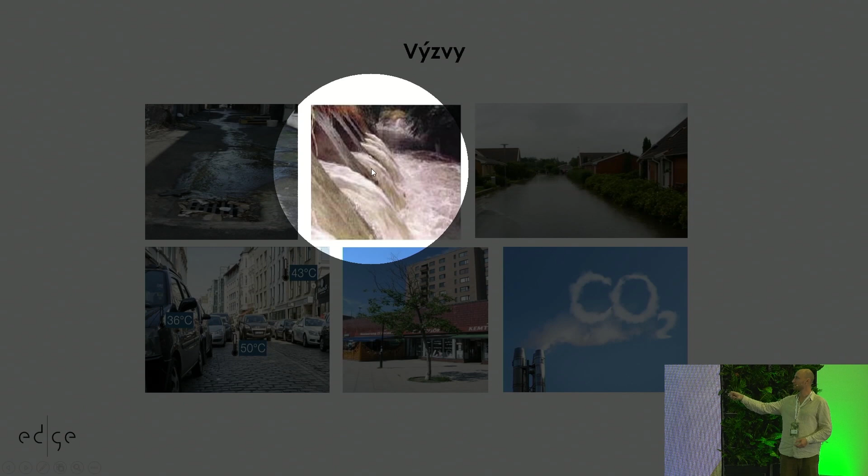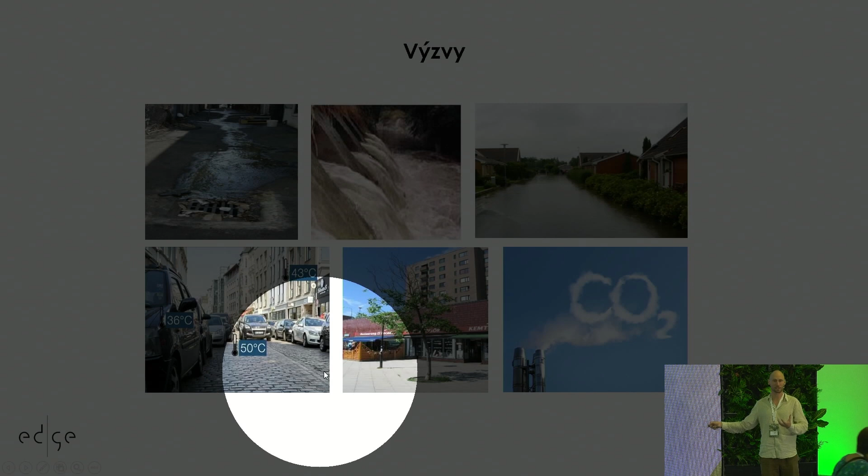As you've already noticed at the beginning, we are facing a couple of big challenges as a society. We need to take care of the pollution in our waters if we want to align with the European directive on waters. We want to reduce the flow of the rainwater, and we also want to increase the retention of the rainfall so that we reduce the risk of flooding in our cities. We also want to reduce the warming in our cities, or overheating. We want to work with the vegetation so that it enables us to get all the ecosystem services that we can get from it. So how to do it in a space with lots of reinforced surfaces?

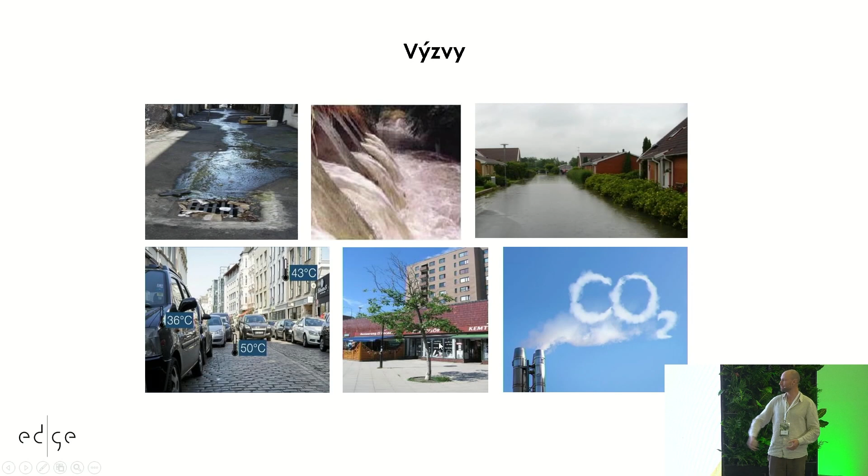And as we've already heard at the beginning from Jan, another challenge is how to adapt, how to reduce the carbon footprint, because even though we reduce it, we will keep producing some carbon footprint, and how to optimize the selection of material and also the volume of the material so that the carbon footprint is the lowest possible, and so that we create buildings that can reduce CO2 by having vegetation such as trees.

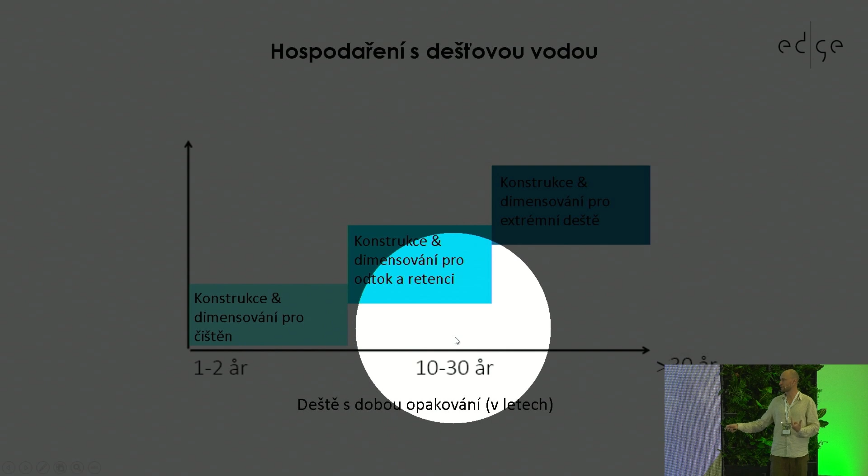So let's get going with the first challenge: what to do with the pollution of rainwater. We work with the rainwater. We usually work with different types of rain. For example, the rains that are regular, for example, 1-year or 2-year rain. It can also be very strong rains that appear only once every 10 or 30 years, and then there are extremely strong rains. And we have blue and green constructions that are being dimensioned for these rains.

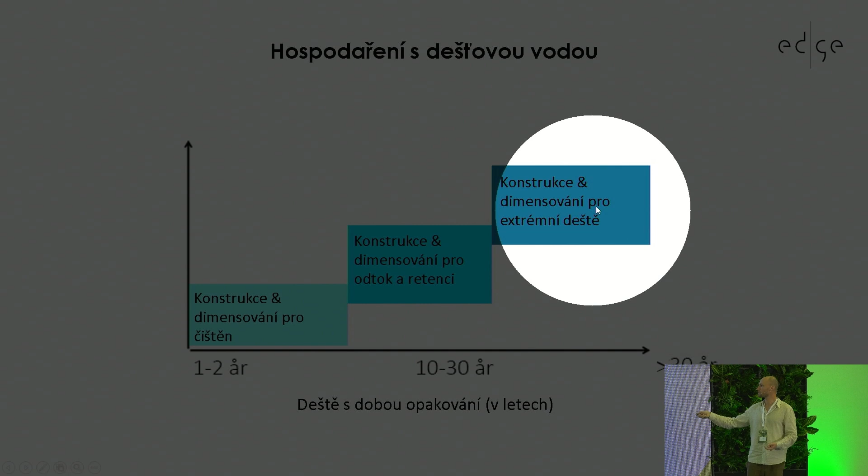Nowadays, there is no construction that would manage to be dimensioned for all these three types of boxes that you see in front of you. So we have constructions that work with purification of the rainwater. We have constructions that retain the water in case of strong rain. And then we also have constructions that can hold the torrential rains.

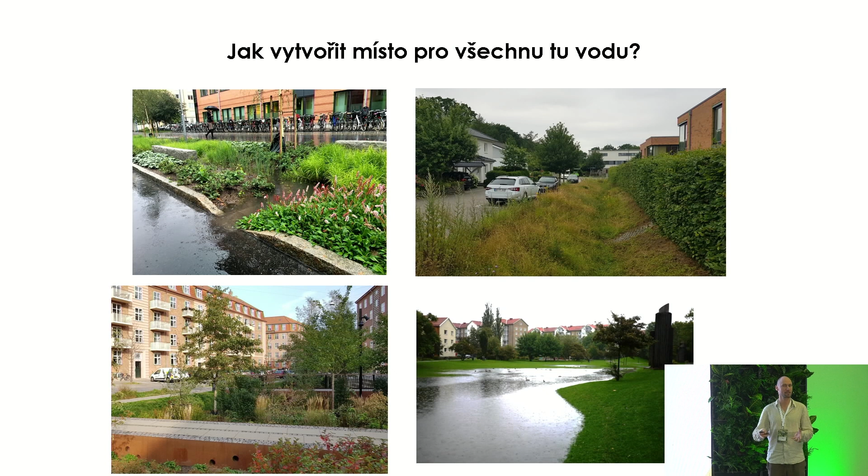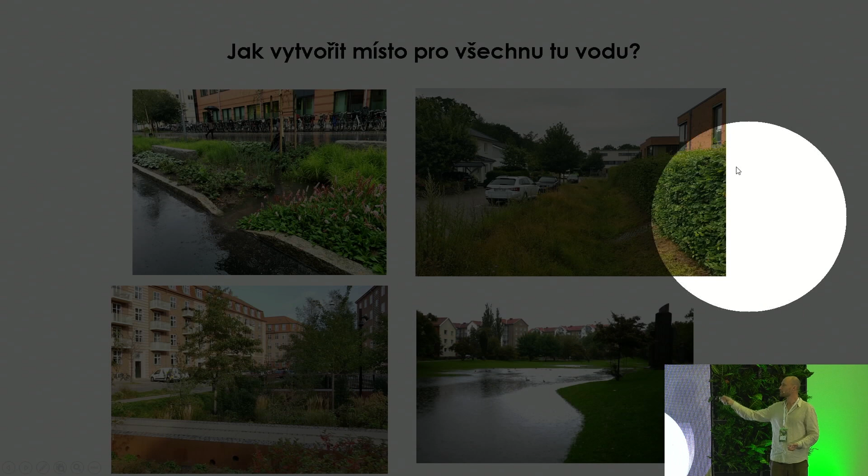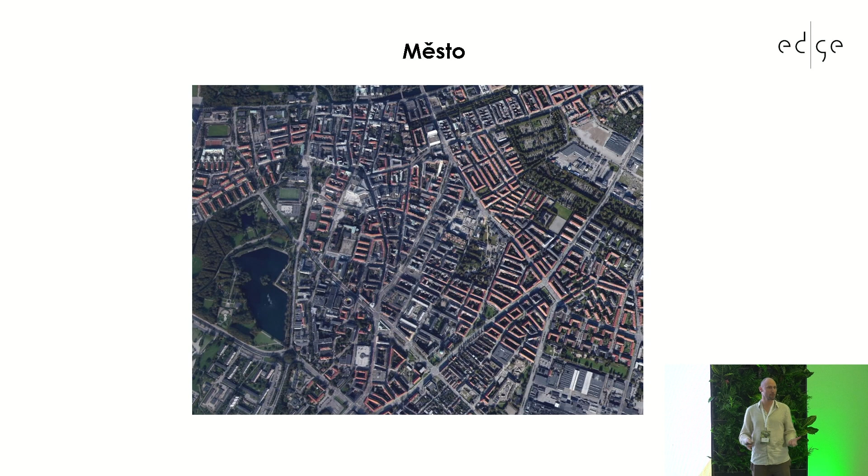And many of you definitely know blue-green infrastructure. This is a topic that has been in existence for several decades, and you definitely know that there are various surface solutions, for example, swales or various greenery or parks. And all these solutions need a huge space. But if you have a look at our cities, the existing cities that we need to adapt in some way, do we have any room for these solutions? Because they are already built. There is lots of infrastructure, either above or below the surface or on the surface.

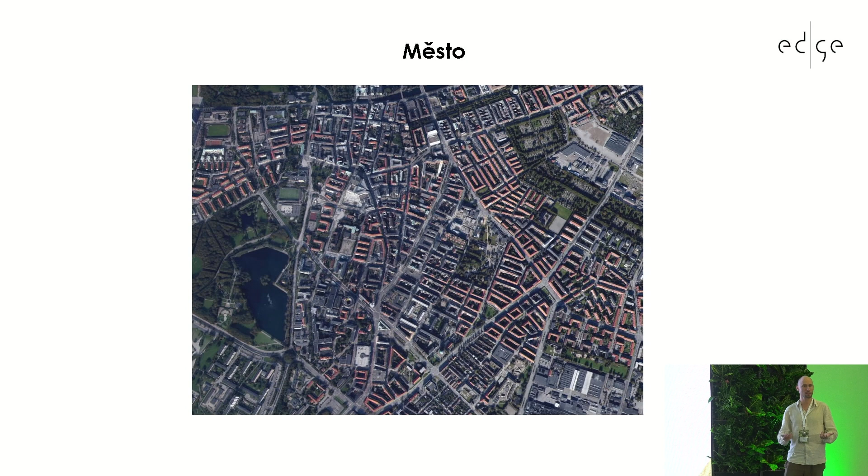How to get these solutions there so these solutions are also efficient and they can address these challenges? And how can we get trees into these spaces? Because we need to get there also this ecosystem services or ecosystemic services, so not only to retain the rainwater.

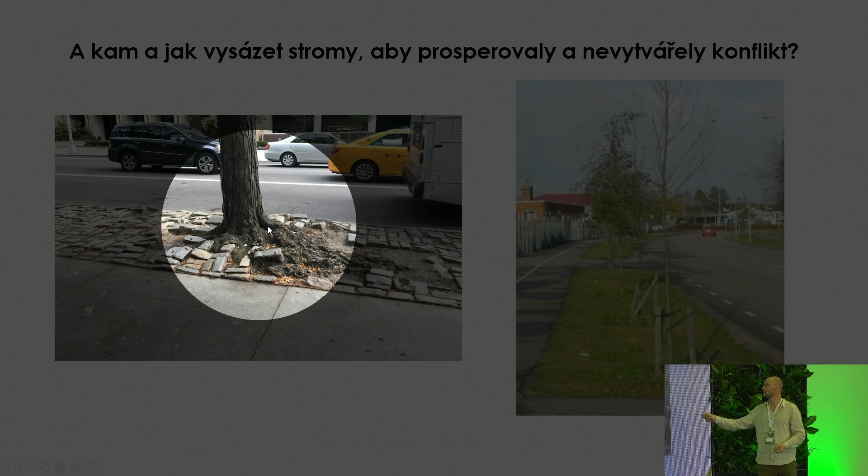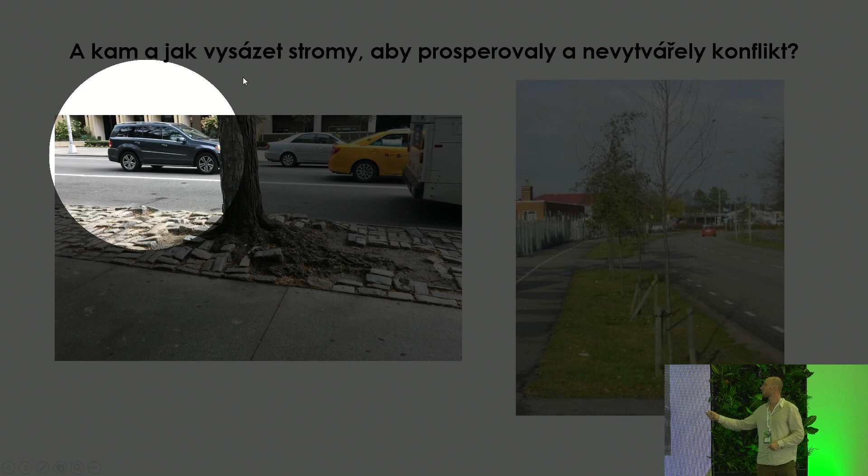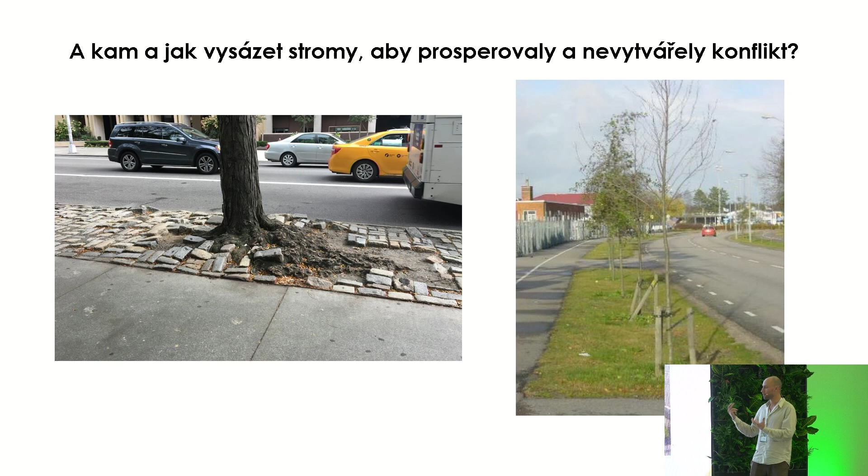And if we have a look at the space of a regular street, we are used to the fact that for one function, we create one system or construction. If we want vegetation, we create vegetation area. If we want to fulfill the function of transport, we create a reinforced surface. And if we want to take care of the rainwater, we create rainwater sewage or canalization.

But if we create a special construction for every function, it will cost us a lot monetarily and also energy-wise. And still, to get this function separately will not be efficient. We need to create this functionality that is entangled in one space. So we need to think about how to do it. As it was mentioned, the quote by Albert Einstein, we cannot continue creating the spaces in the old way. We need to think differently. And we need to open our mind. And this will be the goal of the following slides, to open to new ideas.

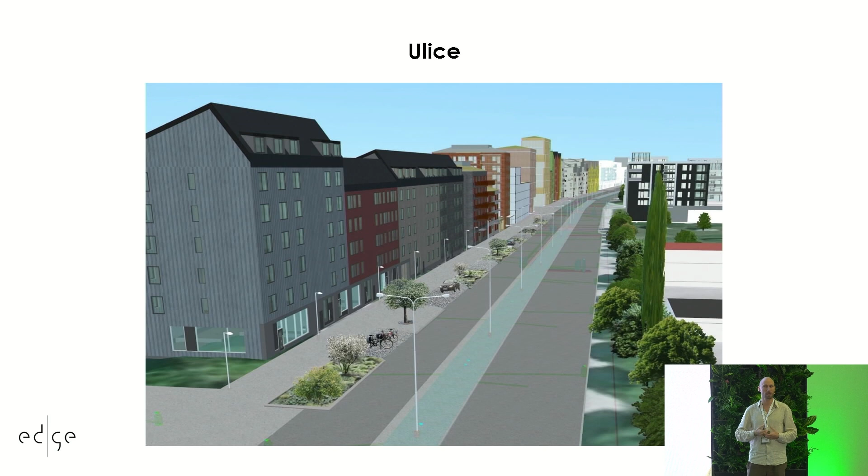And getting back, when we were working with these challenges and opening to the questions of how to do it, we looked at the space of such street and we started to think, what is present everywhere so that we can just change the material that is already there without any significant change to the surface. And we had a look.

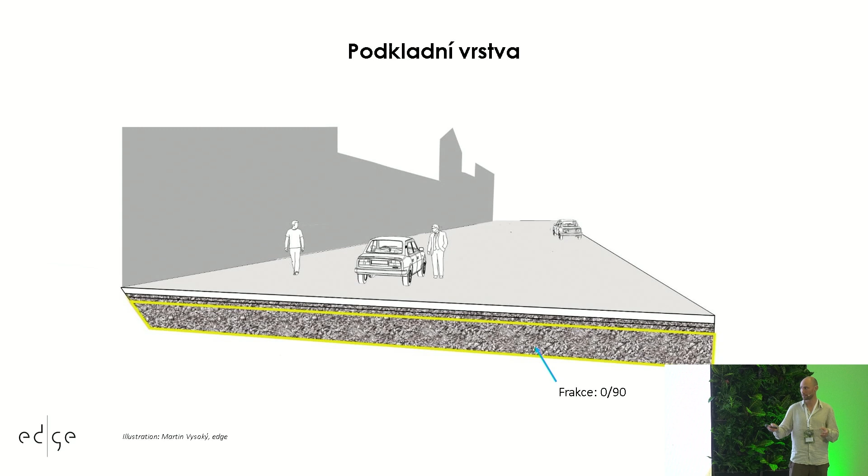If we look at the reinforced surfaces, the constructions for transportation, the biggest volume of material is under this construction, whereas the subbase layer that has the function of bearing the load. Usually, part of the construction is containing the fractioned stone where no water can get.

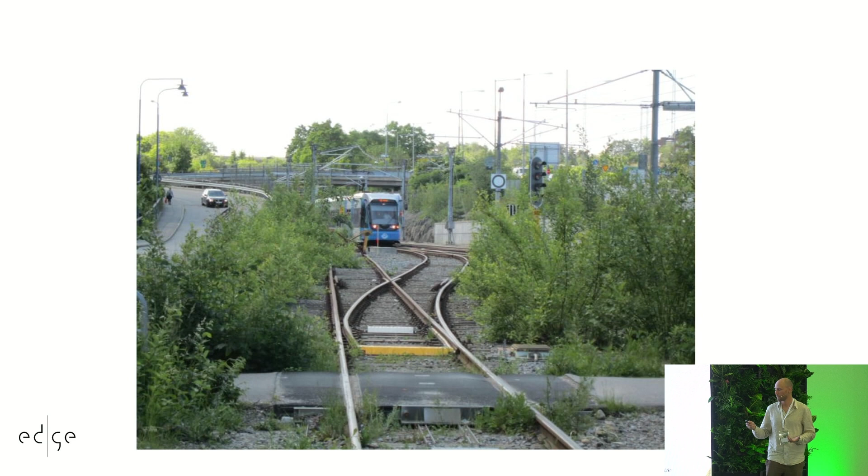However, these are constructions that can bear the load, and at the same time we can work with the rainwater economy, and if we don't use any herbicides, the vegetation can grow. What is different here? The difference is that here we work with macadam and such, and then the space for water and roots can appear.

And coming back to the construction of roads, of reinforced surfaces, if we put away the soft components, we create place for pores. And if you work with macadam, we have porosity between 30 and 40%, which is around 300 or 400 liters per cubic meter of this material that we can retain.

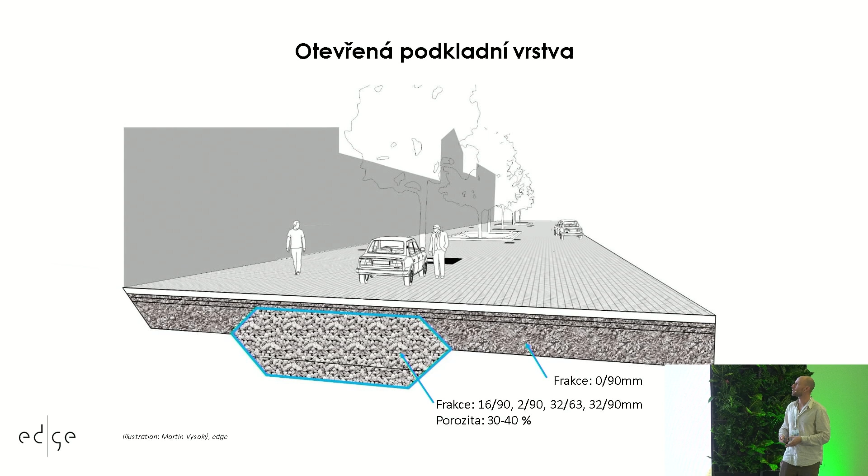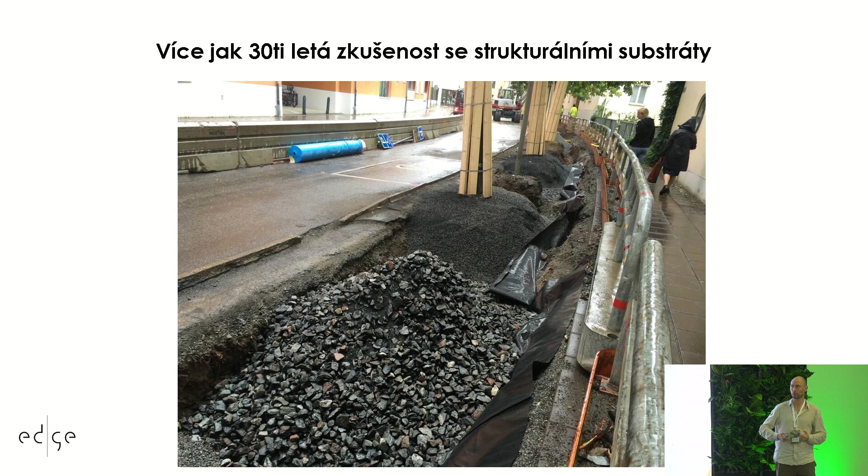So the difference is that the material can be replaced by another material, or actually by the same materials, but of a different fraction. And we are working with open subbase layer, which is something that we have been working with in Sweden for a couple of years. We are supporting these fractioned stones, and we are just enriching this with compost and biochar.

As you can see in the picture, when this has been applied at this place of trees, you can see that the tree was not really nourished, was not really healthy. With this approach, the tree started to regenerate itself, because we have created the space for the trees, and at the same time we have a long-term solution that is also sustainable for the trees.

And we can also see it with the new plantations. We can compare it with the old plantations that have been here for a couple of decades, because they stopped their growth in time. But if we take care of the conditions for the trees in the substrate directly, the tree grows further, and it also offers ecosystemic services.

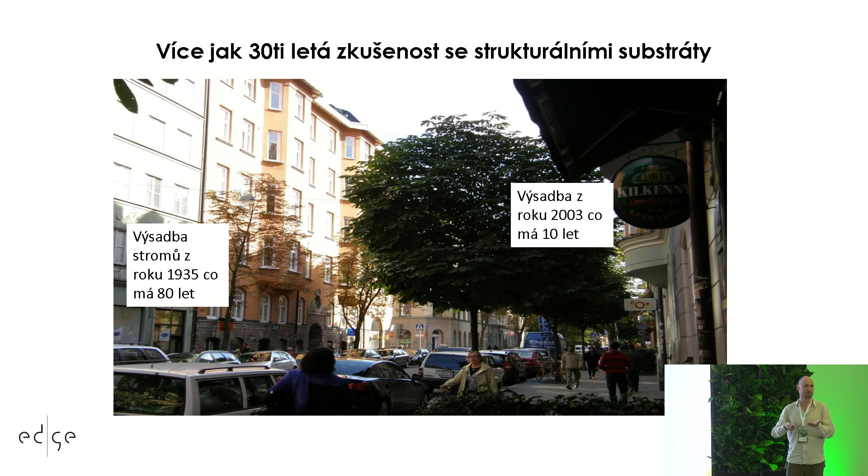And we can see that the tree is already 10 years old, and the other one is 80 years old, and you can see the difference in investment. So this is also the principle of how we work. We work with these roughly fractioned stones.

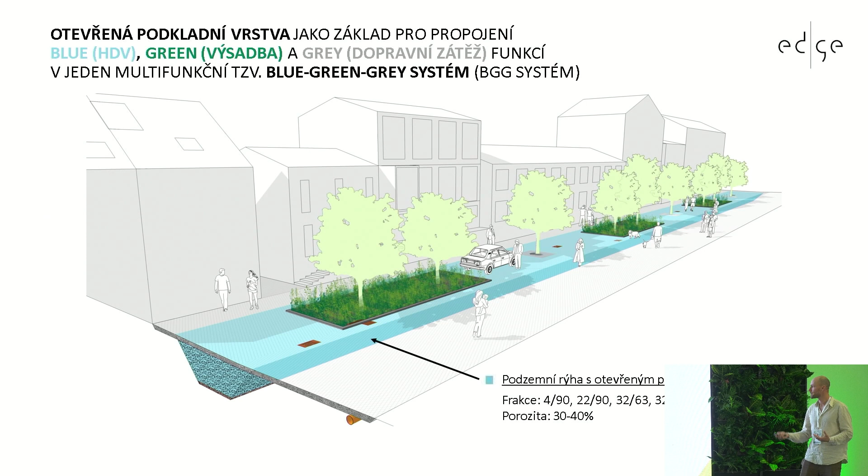We use the open subbase layer. We create a trench or a groove, and in this groove there is a space for the water and also for the roots, and we can put all constructions there that we are used to work with. For example, we have garden bed or rain bed, vegetation area or reinforced area,

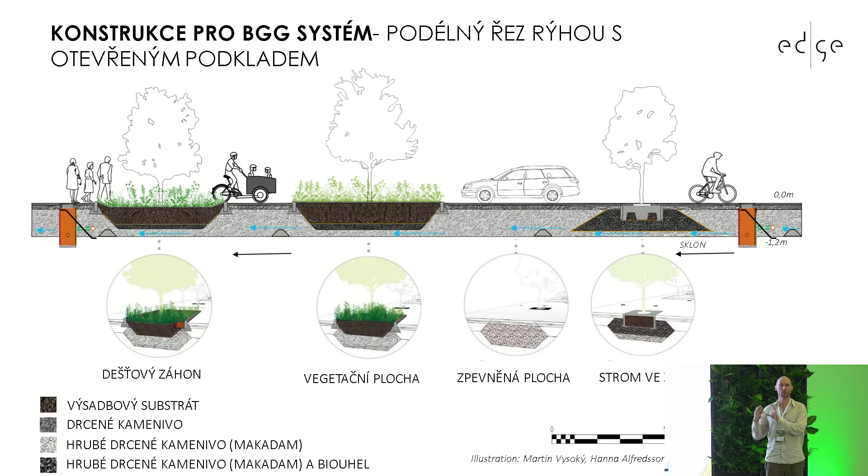but we have already the base, the foundation of the coarse fractioned stones, and this is the way how we can influence its attributes. And this is also material that architects and construction companies are used to work with. And so this is where we are putting it within our system. We are still working with structural substrate. You can see the black color. We are still working with the components of the compost and biochar, but we are working with it in a more conscious manner.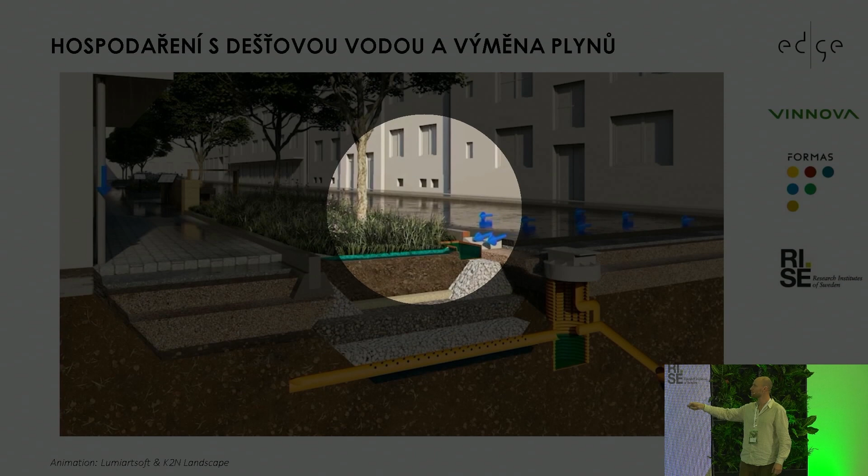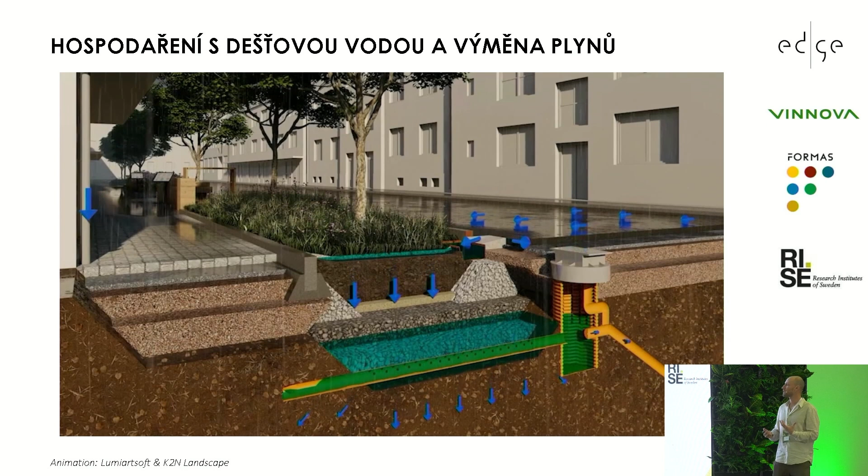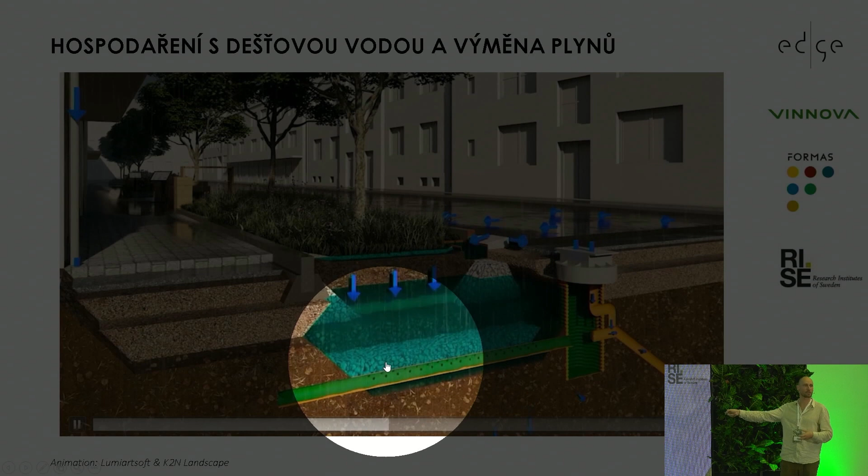And you will see a video here where you can see how we are managing the rainwater. So if we have a regular rain, the rainwater firstly goes to this rain bed, and we have some retention capacity for the rainwater so that it can be held there. This is already something we are used to. But if we have some stronger rains, like once every 30 years, for these we have to have additional space. And if this bed gets full, it can go into this opening. And here is where the space is being created and utilized.

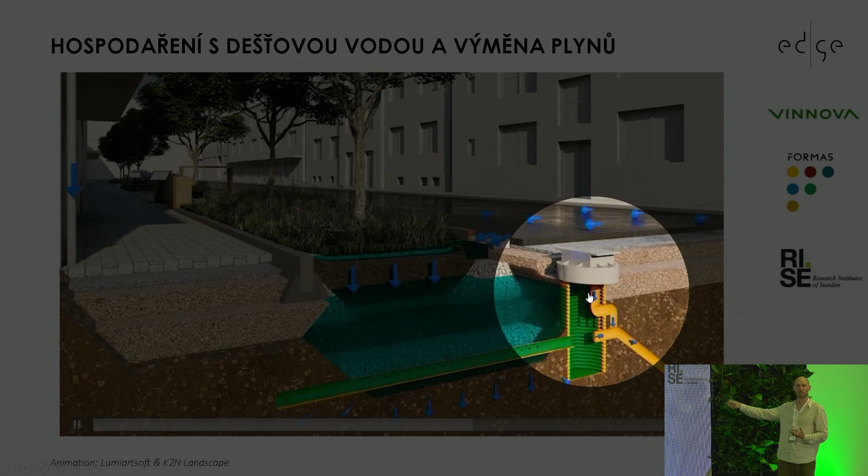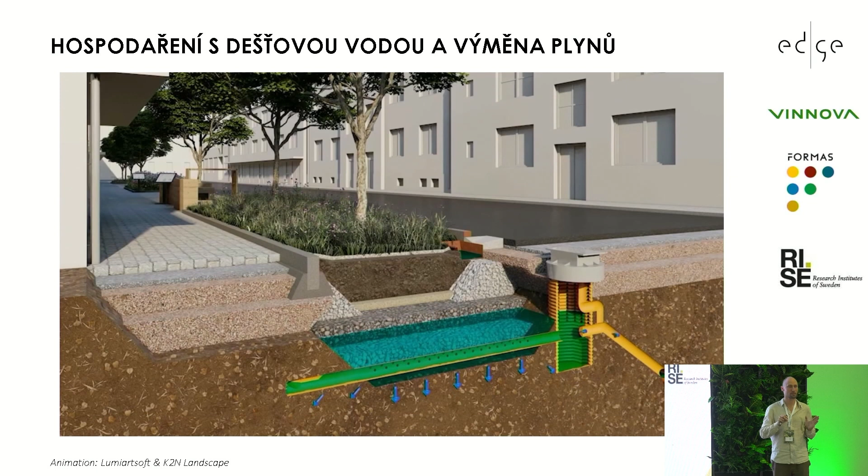And if this is full, then we have a security outflow where the water can continue to flow. Usually the system is empty within 24 hours, which happens thanks to this security output. But we also have a regulator here that regulates the emptying out of the system in a slow manner so that it's not overloading the sewage system. So the conditions are usually limiting, and that's why we combine water management system with the elements of blue-green infrastructure.

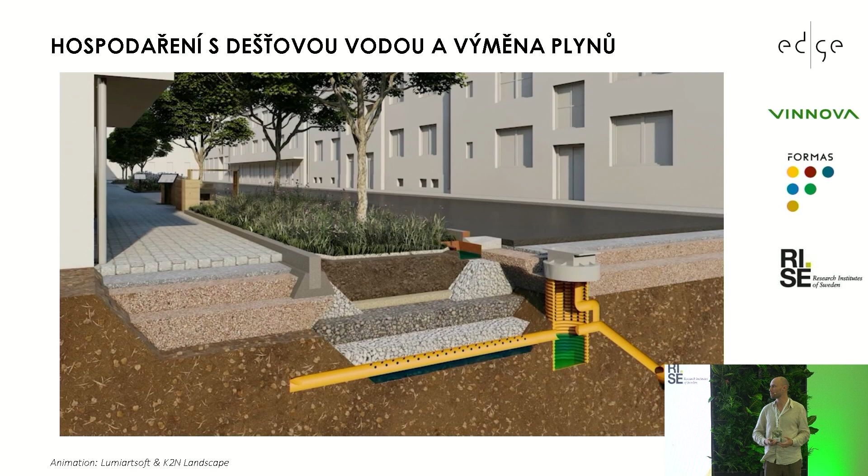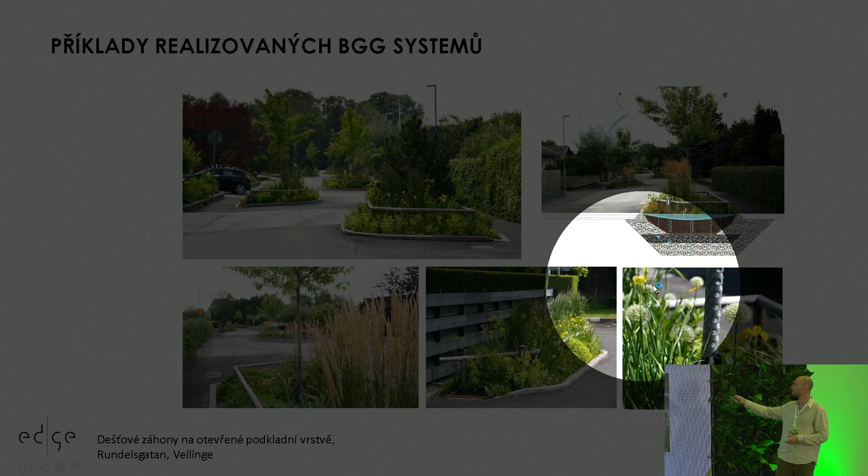Also, the roots of the trees always need to have access to oxygen. And this is what happens here, because the water pushes out the carbon dioxide, and that's how the trees get to their roots, to the oxygen, and they can grow. And these are some examples of our executed systems, blue-green-gray systems. So these are rainwater beds, and underneath there is an underground groove where the excess of water can be utilized and directed towards the roots of the plants. And this is what it is about. We need to use it efficiently.

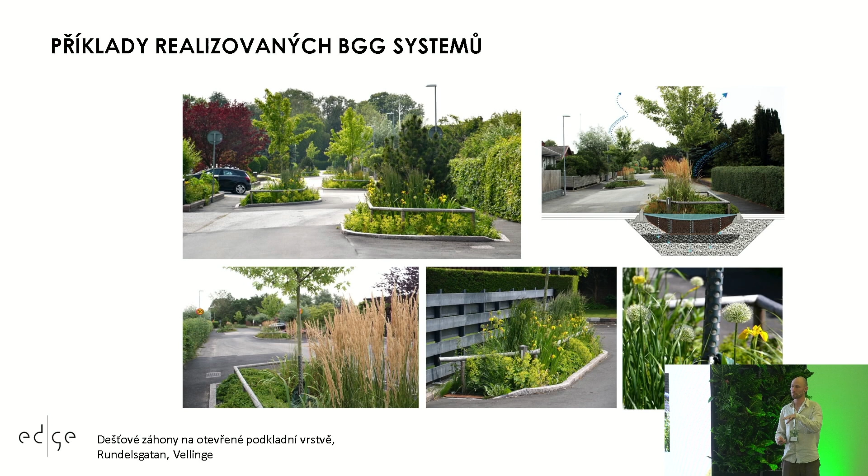I was talking about technicalities, which are important, but what we also do is that we create a public space that is safer, that is more beautiful. So the car comes, the car slows down because there is a kindergarten, because this is also the idea. That's why we put the beds here in this zigzag way. We work with diverse vegetation. You can see various trees which also create a specific aesthetics during the season. So it's not always our goal to deal with technical challenges, but it is about creation of beautiful spaces that can communicate with the people so that there is some added value, so that it is not only about creation of a technical element.

And these challenges are, I think, not only of Sweden, but of course other countries. We started to cooperate with Prague. They have created the conditions for the construction of these systems. We contributed to that with our knowledge and experience. Here we see a historical part of Prague. It's Smetanovo nábřeží. But we also have other challenges, for example, the opinions of experts in history.

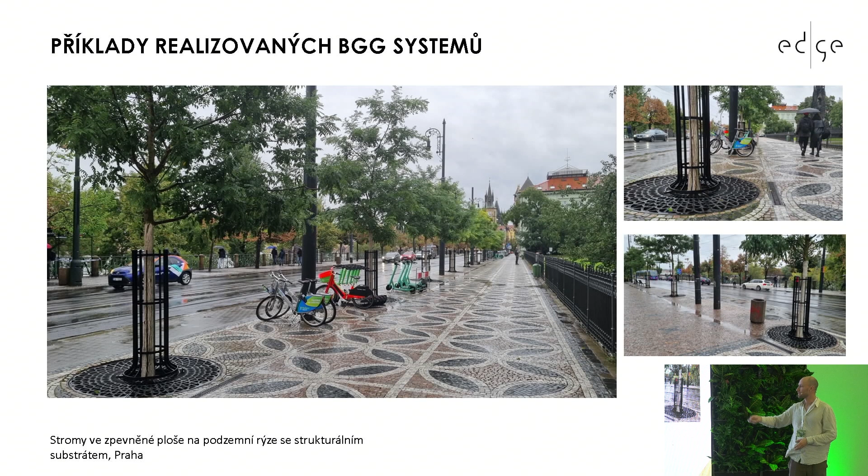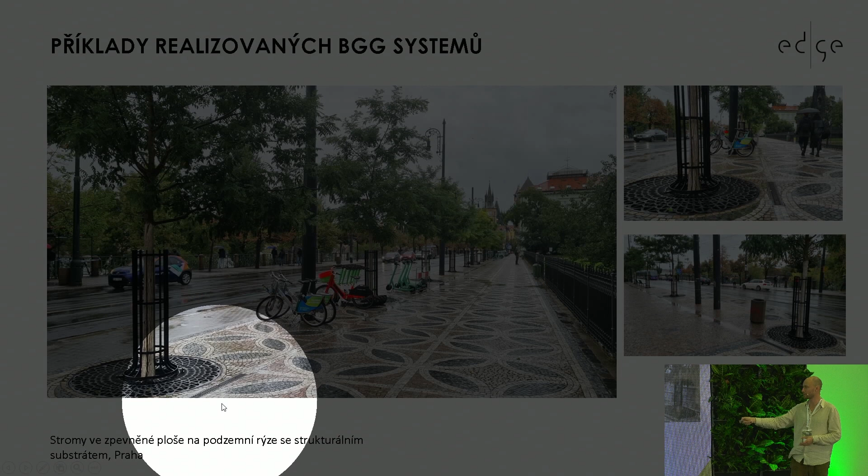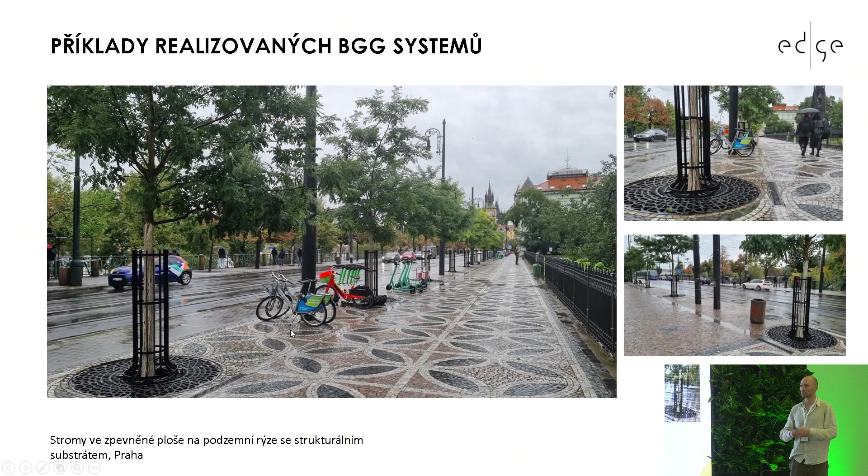You can see the long line of open subbase, where you can see the 3 trenches. And we are directing the water through these grooves directly into the trenches, and it's being absorbed by the underground groove that is under the tree trench, aligned with the line of trees.

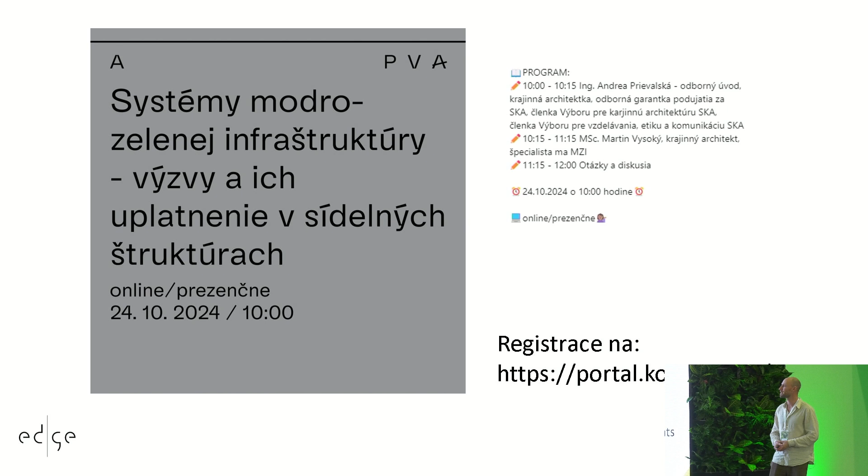My input is just a teaser for the topic. We are going to talk about it again on Thursday in Bratislava. So you are welcome if you want to get to know more in depth about these topics. You can register here on the portal, and if you are already interested in more information on this approach, we already have some guidelines that we have created for the cities of Sweden, and we know that we need to spread this knowledge out among other experts so that we can continue to draft new ideas.